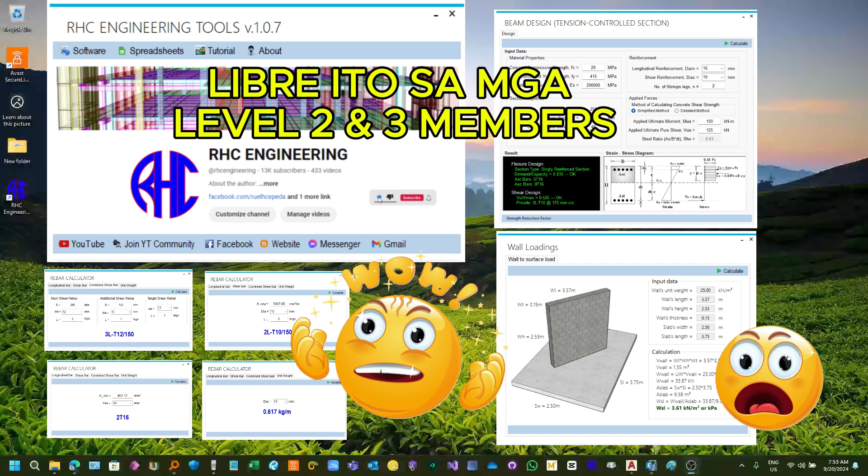For today's tutorial, I will be showing the updated version of our tools para free sa members natin from level 2 and up. So without further ado, let's open the tools. So ito na yung bagong interface ng tools natin. Then, ito yung bago natin.